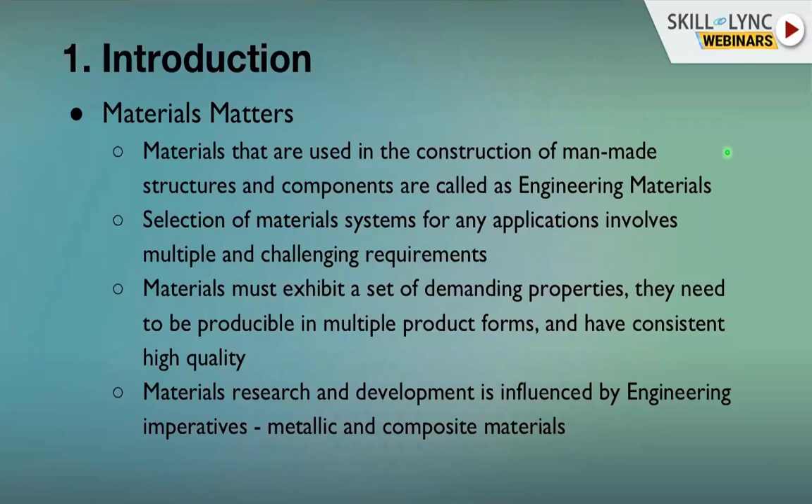So this all in crux says how materials are important in our day-to-day life today, and what further significance materials have going forward. Now, basics of the materials. As I mentioned, engineering materials are man-made materials tailored to the end application. How these engineering materials evolve, and what are the important properties of these materials, we'll see in this slide. So first we start with structure.

The material structure is the basic building block for any property or end application we derive from that material. There are different types: atomic bond, crystalline structure, amorphous structure, semi-crystalline structure, and polymer chain. Any material consists of atomic bonds. In atomic bonds we have different types: covalent bond, ionic bond, metallic bond, all those things.

Then crystalline, it may be polymers or metals, and then amorphous materials. Then semi-crystalline, which is again for a family of polymers like PEEK or polypropylene, which have a semi-crystalline structure, and then polymer chains like rubbers or polymers which have that chain, then cross-linking happens, and we get the end properties. Now coming to properties, we broadly categorize them into physical and chemical, and mechanical.

So coming to physical properties: the melting point of that material, specific heat, thermal conductivity, thermal expansion, electrical conductivity, magnetic properties, corrosion or corrosion resistance. So the importance of some of these properties: thermal conductivity. Sometimes we want materials to have very high thermal conductivity so that the heat dissipation happens quickly. But sometimes we don't want that heat dissipation to happen quickly, so we don't want high thermal conductivity.

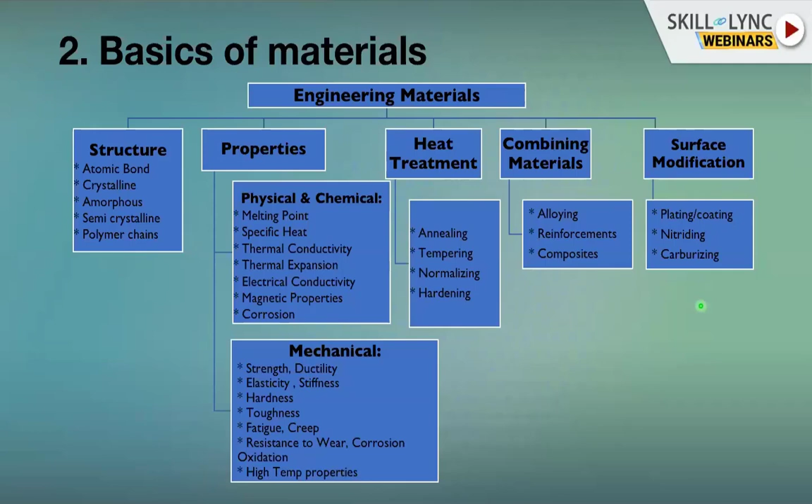Then coming to application requirements. I was telling in the previous slide that engineering material itself is derived from the end application, but what are those application requirements when we come to the different industries? Coming to mechanical industries, what we need is high temperature materials for gas turbines, jet engines, etc., mainly for increased efficiency and wear resistance. But this is not the only requirement. There are hundreds of other requirements.

Coming to electrical engineering, electrical devices or machines can be operated at a faster rate with minimum power consumption. This is where we look for materials with those properties. Those materials should have very good electrical conductivity, and the equipment or devices should operate with less power consumption.

Second, today's challenge is power loss. When you transmit electrical power to perform that function, the power loss is more than the power consumption in some cases. So how do we come up with different materials that make that electrical energy very efficient?

So that's where we are further developing materials, and, as I was mentioning about the transmission loss, there came the superconducting materials. Why superconducting materials? When the material is made to superconduct, the loss is almost zero, so whatever energy you generate is all available for use. That's the great thing. So this again drives the material application or the material invention.

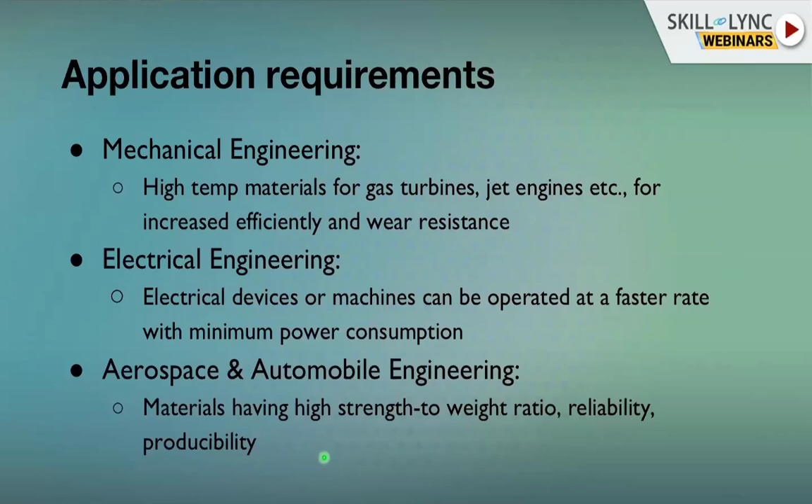Then coming to aerospace and automobile, materials having high strength to weight ratio, so we need less weight material to carry more load, which gives fuel efficiency, more reliability and more producibility. And again, as I mentioned, these are not an exhaustive list of property requirements, but these are the main property requirements when it comes to applications.

Further continuing on that, electronic engineering. Electrical we saw, but in electronics, materials that are useful in the fabrication and miniaturization of electronic devices. Miniaturization, you can imagine. 40-50 years back, when the first computer was invented, the computer with the smallest capacity used to occupy a big room. Can you imagine one single computer occupying a whole room?

Today we have an iPhone or a mobile which can do all the functions, but imagine the size. It is just half your palm size. From a computer of whole room size to a device of palm size. How did it happen? It happened because of material invention, different materials got invented, semiconductors or high computing devices, and again the miniaturization.

So again, you can imagine the floppy disk. 30 years back, we all used the floppy disk, and each floppy disk could store a few MBs of data. But today we have the smallest pen drives, and they can hold terabytes of data.

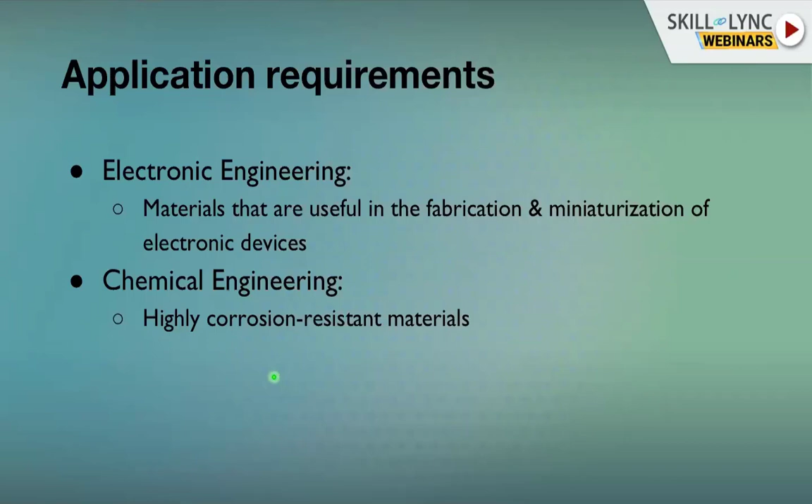So I covered the introduction or the overview of materials as such. Now, I was mentioning that the properties or end requirements drive material research and development. And realizing those exotic materials has given so many advantages to industries, like a computer, storage devices, a mobile phone, and aerospace.

When the Wright brothers first took their plane up in 1903, it lasted for only 12 seconds. And today we have flights of about 18 hours non-stop. How can this happen? There are many technological inventions there, but materials also played an important role.

Then, as I was mentioning, on one side we have metallic materials, on the other side non-metallic materials. How can we combine the two, or within non-metallic materials, how can we combine different materials and come up with a new material? There came the composite material. A composite material is a combination of two or more materials with different physical and chemical properties. This is a point to be noted.

You are combining two or more different materials, but all have different characteristics, different properties. But in a metallic alloy it is not like that. You combine two or three metallic elements with one or two non-metallic elements, but those metallic elements have similar properties, like they can conduct electricity, conduct heat, and they may have luster. But in a composite, all constituents have entirely different properties.

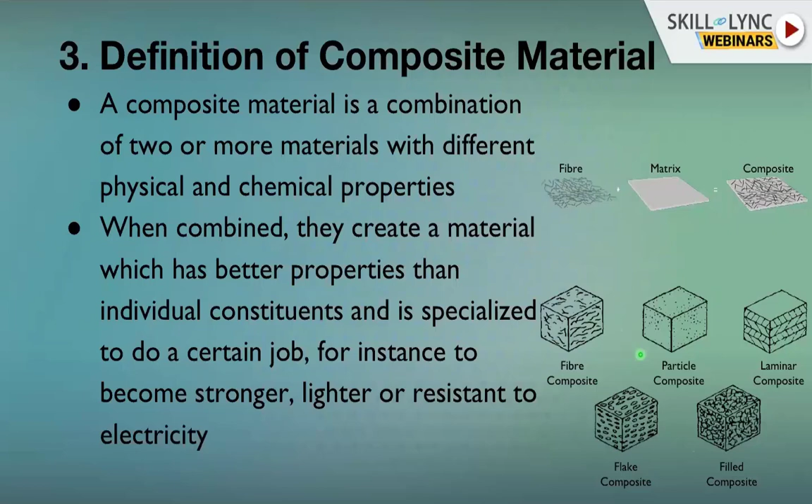Then laminar composite, where these fiber composites are laid one above the other, laminae of composites. Then flake composites, where the reinforcement is like flakes, maybe graphite flakes or carbon flakes. Then filled composites, which have a larger reinforcement amount, depending on the application. So these different varieties of reinforcement can be put into composites.

Further, do you know our bone is a composite material? Have you ever thought of that? Yes, it is, and it is the best known natural composite material, along with wood. Wood is made up of cellulose fibers, the reinforcement and load carrying members, in a lignin matrix, and bone is hydroxyapatite particles in a collagen matrix. So both wood and bone classify as composite materials.

A composite material is typically made up of relatively strong stiff fibers in a tough resin matrix. Okay, so why this tough resin matrix? So again, as I said, each and every individual constituent of composites has its own role and responsibility. So reinforcement will be stiff, strong fibers, so that they act as the main load carrying member in the composite, whereas resin is a tough matrix which holds the fibers together and which acts as a load transferring medium, and also it protects the fibers from environmental damage.

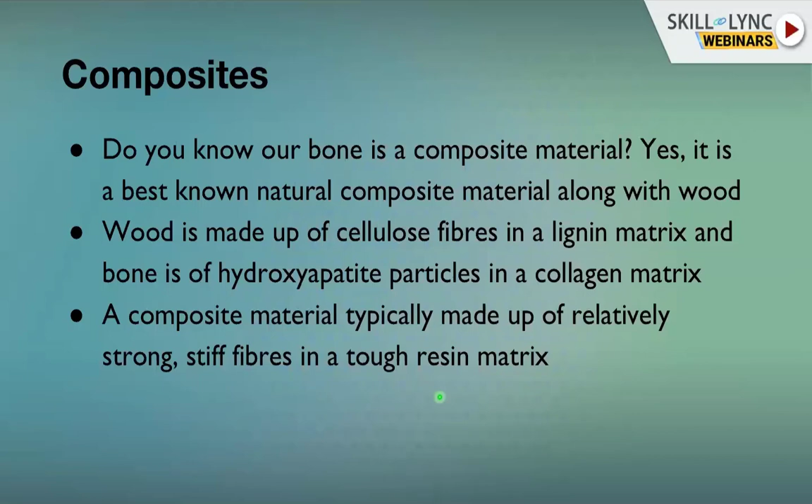Okay, these are the main functions of reinforcement and the matrix in composite. Then going a little more into the composite. So man-made composite materials used in aerospace and other industries are mainly carbon fiber reinforced plastic. So you normally come across CFRPs and glass fiber reinforced plastic, GFRPs, which consist of carbon and glass fiber respectively. In the polymer matrix, if you add carbon fiber as a reinforcement, it becomes CFRP, and if you add a glass fiber, it becomes GFRP.

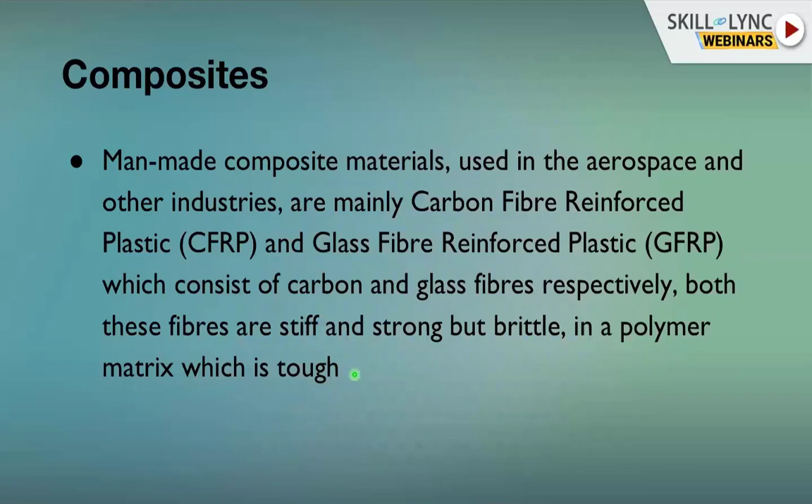Both these fibers are stiff and strong but brittle, but in a polymer matrix which is tough. So together these two constituents give that advantage or optimized properties for these FRP composites. By combining these fibers and resin with complementary properties in this way, a composite material with most or all of the benefits. I said the reinforcement has its own advantages and benefits, and matrix has its own advantages and benefits. So when you combine the two, it will give better properties, and it will also retain its own individual constituent properties like high strength, stiffness, toughness, and low density.

Okay, so that is another advantage why we went for composites. By combining different materials and optimizing them for the properties, we are reducing the weight of that component. Weight reduction is the biggest requirement when it comes to aerospace, or to some extent automobile, or any industry, consider even construction. The first carbon fiber was patented in 1961. See, it is not that old technology. It is very new technology. It's about 40, 50 years back, and then it became commercially available.

And see, 1990, about 30, 31 years back, composites were starting to become increasingly common for manufacturing processes and construction. Construction means not civil construction, it is construction of any vehicles like automobile, aerospace, space stations or space launch systems. So that gives you insight on how composites started and where we are today. Today aircraft with more than 50% composites are flying. And coming to space launch systems, or next generation transport systems like flying cars, they all will have more and more composite materials because of all these advantages like less weight, high strength, high stiffness, high toughness, high corrosion resistance, high environmental resistance.

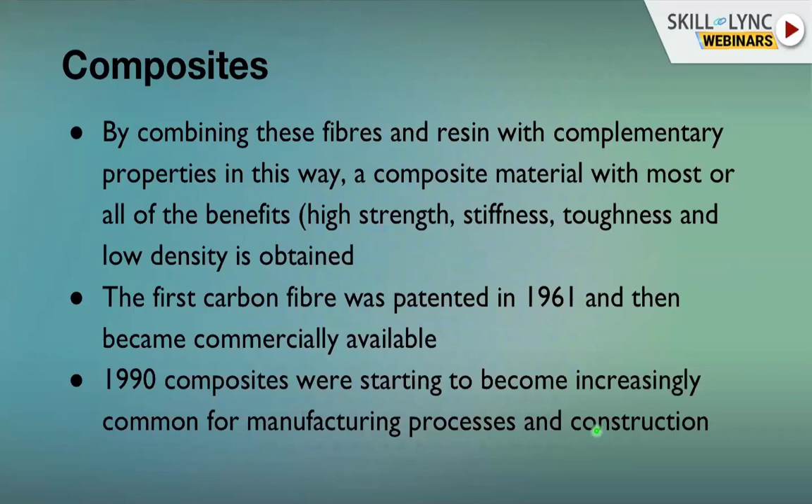Difference between alloys and composites, I briefly explained that. Alloy is defined as a mixture of a minimum of two elements in which one must be metal. So if you say steel, it is made up of carbon, iron, and then other additional metallic materials like molybdenum, tungsten, chromium, all those things. So it scores more on the metallic side, because only carbon may be the non-metallic there.

But a composite is defined as a mixture of two or more elements for which metal is not required at all. All can be non-metallic, or it can even be metallic, and I will explain a little detail on that, because when we come to MMCs, metal matrix composites, we will have metal as the matrix. The matrix material is metal, but other than that, all other composites are normally non-metallic.